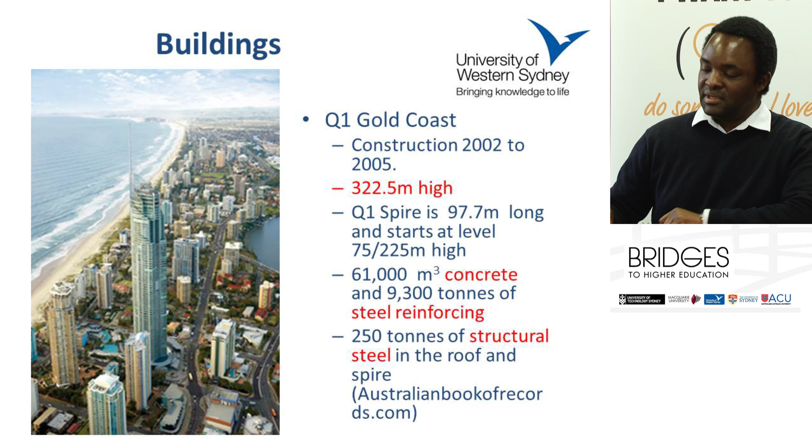The other structure which might be of interest, or which people might have heard about, is Taipei 101, constructed between 1999 and 2004. It has 101 floors, and is made from steel and concrete filled columns.

With the concrete filled columns, we can classify those members as composite members. We have a tube made from steel, and inside these tubes we have concrete infill. One advantage is that steel is a ductile material, while concrete is not a very ductile material.

When concrete is confined in steel, we're able to use a material with high compressive strength, but we also improve the ductility of that concrete because it's working as a composite material confined by the steel tubes. This structure, Taipei 101, is about 508 meters tall.

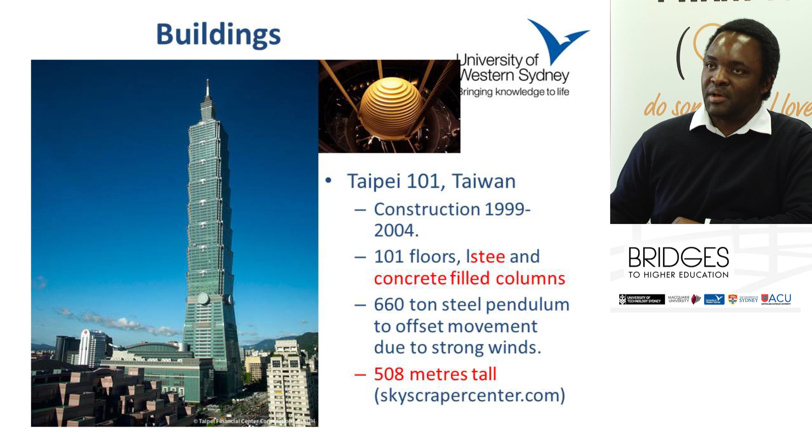And maybe a building for the future, the Kingdom Tower, which is supposed to have started construction last year and is scheduled to finish in 2019. So this building is going to be 1,000 meters tall.

You can see from the structure that maybe the rest of this structure is actually a spire at the top. A lot of times, developers of structures want to break records, and one of the ways they do that is to use structural steel to form a spire at the top, so that they can gain a lot of height.

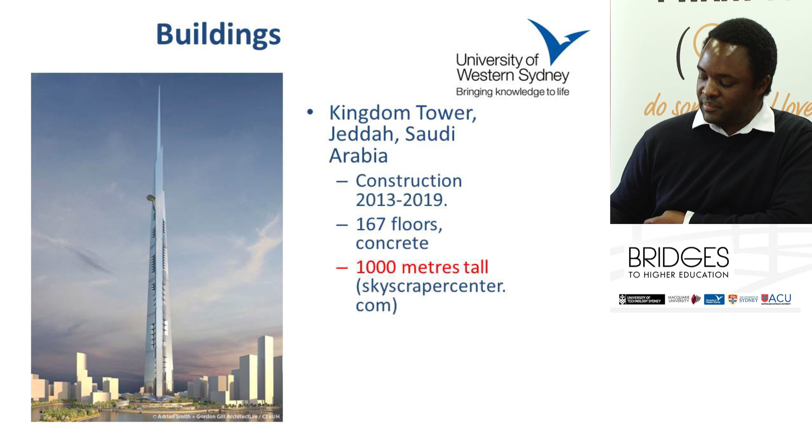The advantage for steel is that it's lightweight, and because it's lightweight, it's able to span very large spans. So if you take the spire as a cantilever beam at the top, it's able to resist the wind loads which might be at the top of the structure, but still be serviceable. It's not going to deflect as much, and it's also not going to bend as much, so it's able to carry the loads which are mainly wind loads at the top of the structure.

I think a lot of times we don't consider timber to be a material that we can use for high-rise buildings. But as you can see here, there have been quite a lot of developments in timber structures. So there is a new type of material which is called cross-laminated timber.

This material is manufactured using laminations of different layers. By doing that, we actually improve the reliability of the material. And then if we use these panels, they actually have compressive strength which is quite close to that of concrete.

But the advantage of timber as well is that it's not as brittle as concrete, and we also don't need to reinforce it as we would require to do for concrete.

So this Forte building in Melbourne, it's 32 meters high, which is, I think, one of the tallest timber structures in Australia. But I understand that there are a lot of other buildings around the world as well which are made from timber for sustainability reasons, because timber can become a carbon sink.

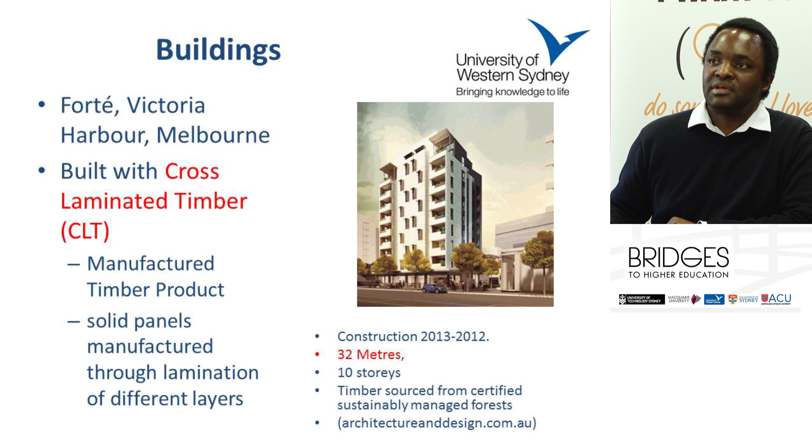And for bridges, I think we all know the Sydney Harbour Bridge, which was built starting maybe from 1924 and officially opened in 1932.

I think one of the interesting statistics is that there were 6 million hand-driven rivets which were used. If you compare that to modern day construction, we no longer use rivets anymore - we use high strength bolts, and a lot of times, because welding processes are becoming more and more reliable, we also use quite a lot of welding.

This is maybe one of those things where you can see that as time goes on, as we develop new ways of doing things and new materials, we also tend not to use some of the methods which we used to use in the past. But for Sydney Harbour Bridge, I think most of these rivets are quite sound, and the bridge is doing quite well for a bridge of that age.

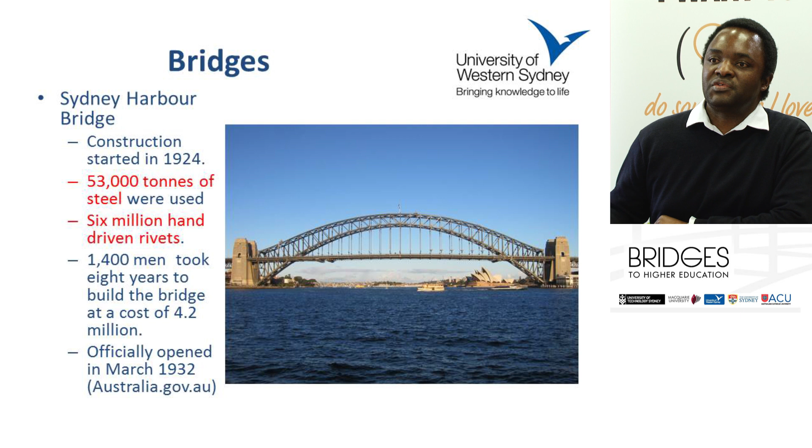And the other bridge that I thought could be a bridge of note is the Millau Viaduct, which has a length of 2,460 meters. And at the highest point, if you are looking at the height from the ground, it has a height of 343 meters. And one of the tallest piers, I think it's Pier 2, has a height of 245 meters.

And you can also see that a lot of concrete has been used in this bridge, but the bridge deck itself is actually made from steel. So 36,000 tons of steel has been used to build the bridge.

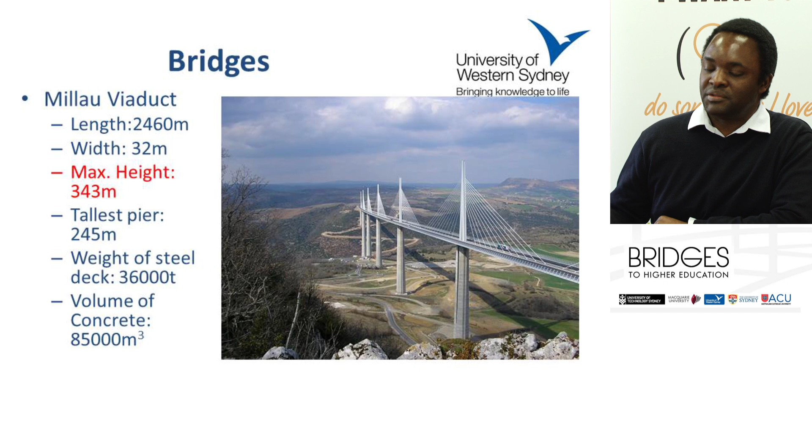Now I think I can move on to talk about the design philosophy for structures in general. One thing we try to achieve when designing a bridge is to make sure the size of members are able to carry the loads. If we have a bending moment, the cross section should be able to carry that. If we have shear force or axial force, the members should be able to carry that, and we have to look at combinations of loads as well. When a structure is built, it has to support itself, so we look at the self weight of the structure, and it also has to resist external loads. So when a lot of people move into a building, or a lot of cars cross a bridge, we have to make sure the structure is still able to support all those loads.

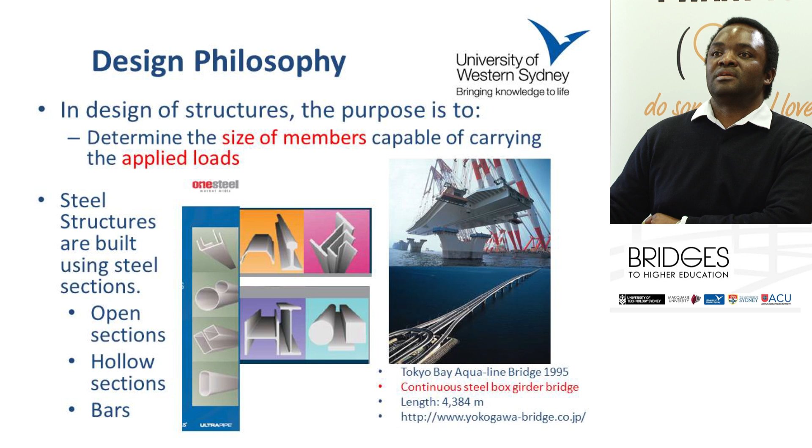So that's looking at steel, and we can also look at concrete. A simple concrete beam would have reinforcing steel and stirrups, with concrete poured around this steel using formwork. But if we start to have quite large spans, such as the ones you can see here, from this pier to here, then we need special type of sections - this is a box girder. Using these box girders, which might be maybe 2 meters high and probably 1.5 meters width, we should be able to build a structure able to span a much larger distance compared to normal beams or concrete beams.

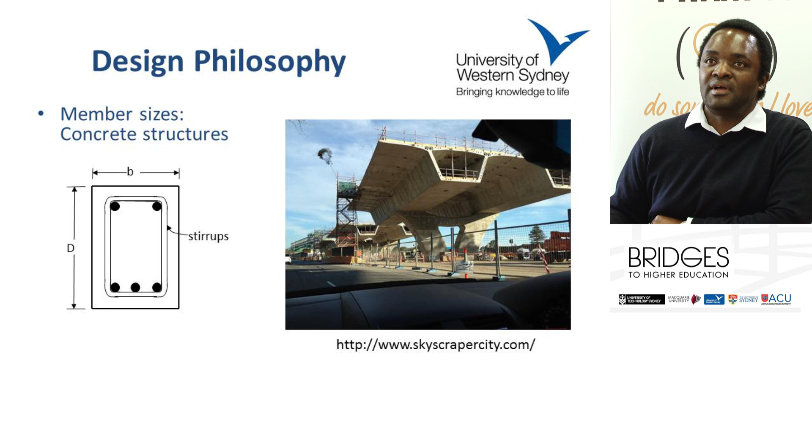In addition to that, we can also have pre-stressing, with pre-stressing cables running throughout the section, because we know concrete works mostly in compression. So when we use pre-stressing, we are making sure concrete remains mostly in compression, and then it's going to be able to carry the loads we require it to carry.

If we look at timber structures, we already talked about cross-laminated timber panels when looking at the Forte building in Melbourne. But in general, for housing, we normally use sawn timber, which could be softwood or hardwood. This is useful for domestic buildings, where we have much smaller spans.

But as we start to build structures made from timber with very large spans, we need to start using special type of timber sections - manufactured wood products. This one is a glue laminated timber, and if you compare the size of the depth of this beam to this gentleman in the picture, you can see the depth is quite high. Through the use of much deeper beams, we know we are going to be able to span much larger distances without any problems in carrying the loads. This might be useful for Olympic-sized swimming pools, for example, or auditoriums in terms of construction.

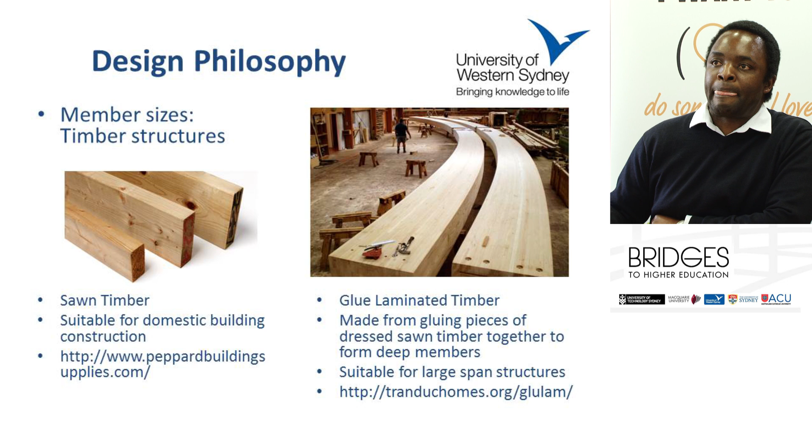One of the other things we have to look at in terms of design is to make sure that our structures are stable and also serviceable. By stable, we mean that if a structure is built, it's not going to topple as wind blows, or if we have an earthquake. So we have to make sure our structures are fit for purpose. Depending on where the structure is, the expected wind loads, and the expected size of earthquake, we have to make sure our structures can support that external load and remain stable for us to live in them safely.

Structures are also supposed to be serviceable, which means that over time, as the structure is in use, it's not going to deteriorate to a level where it can suddenly collapse.

Some of you might remember the I-35W bridge over the Mississippi River in Minnesota, which collapsed, and there are quite a number of theories as to why that might have happened. Some people think there were plates within the structure which were smaller than they were meant to be, but this is the difficulty of forensic engineering after collapse of buildings. It can be quite difficult to pinpoint the causes of failure, because when you look at the structure itself, any point between the two banks could have been a member which failed first. So it can be difficult to tell where the failure originated from.

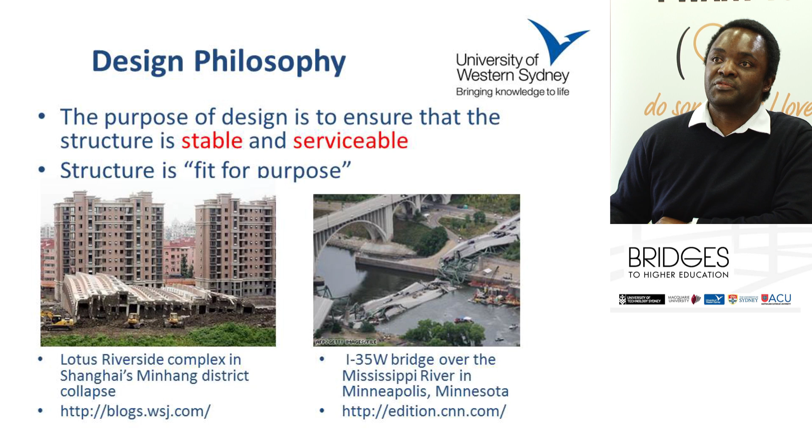As part of our design steps, we normally need to look at the loads. We need to determine the worst combinations of loads, look at temperature effects, and sometimes our structures are just affected by the materials we use within them.

If we use concrete, we know that we are going to have shrinkage. With shrinkage, we might also have stress related to the size of members getting shorter than we expected. The temperature effects could be an opposite effect.

What happens if we have a steel structure and we have high temperatures? Some of you might have heard about the wheel in Melbourne, which was built, but because of a lot of warping within the structure, they couldn't use the wheel. We also need to consider, for welded structures, the weld shrinkage. When we weld structures, we actually induce stresses, which are referred to as residual stresses within the structure. This is one of the considerations we have to have.

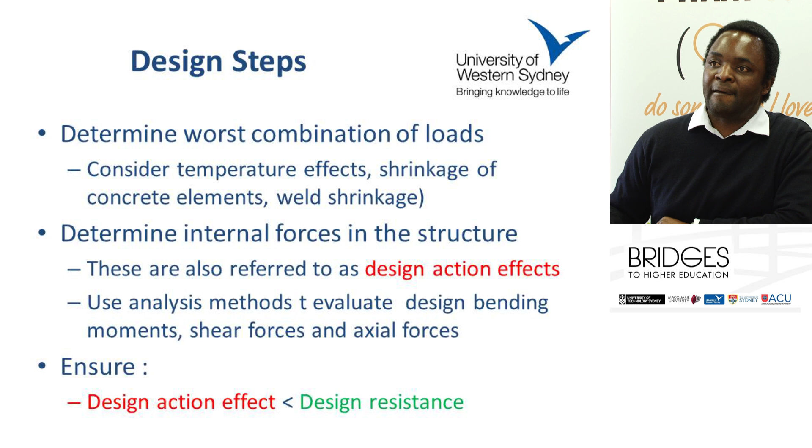In looking at design, we need to determine what the worst combination of loads are, and we also need to look at the resistance of the structure against the applied loads. If we have the design resistance larger than the design action effects, then we know the structure should be okay to withstand the loads applied to it.

I thought maybe we can have a brief look at how we design steel structures, for example, under bending. For bending, if you look at this equation, the nominal section capacity is equal to Fy, which is the yield stress, multiplied by the effective section modulus. This is just to show you the importance of knowing the material within the structure. Fy is the yield stress, and I will talk about that a little bit later on.

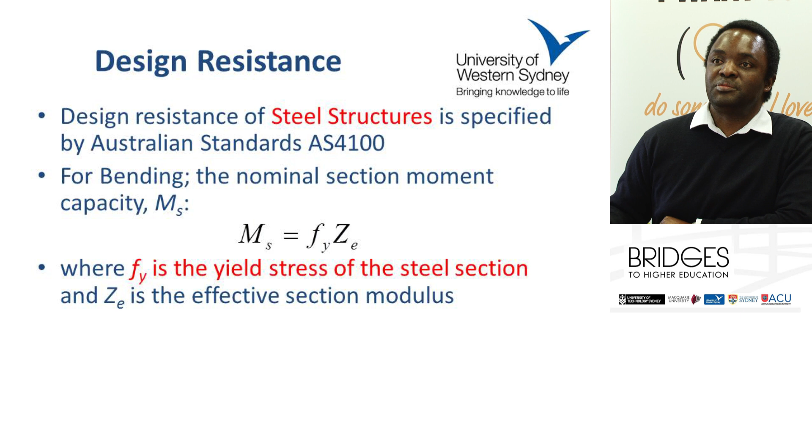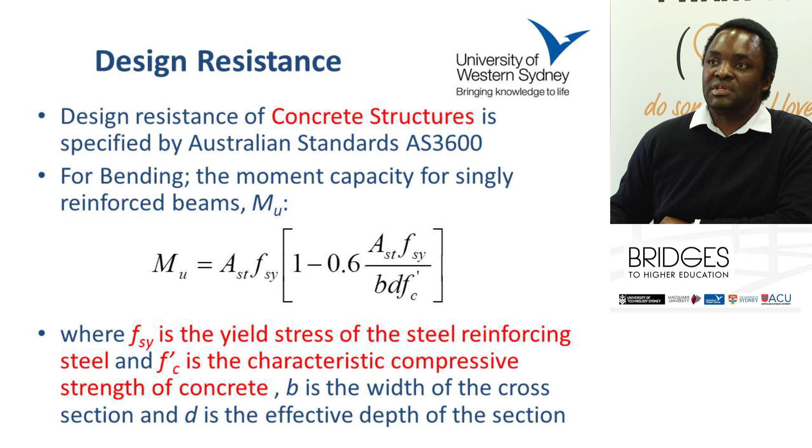If we look at concrete structures, for singly reinforced beams, the equation for determining the moment capacity of these beams is given by this equation. Within this equation, we have Fsy, which is the yield stress of steel reinforcement, and Fc dash, which is the characteristic compressive strength, along with the width and depth of the section. This also shows us the importance of understanding the stress strain curves. By testing the materials we are using and understanding their behavior, we should be able to use those values in the design of the structure.

This is just to show you maybe one of the methods that we use for determining strength. So in this diagram here, you can see the cross section, and you can see the neutral axis.

And for reinforced concrete, we know that concrete doesn't do very well under tension. So what this does then is ignore the concrete which is below the neutral axis, and we are just using the tension from steel.

Because the cross-section is in equilibrium, we know that the compressive force from the concrete in compression should be equal to the tensile force in the reinforcing steel. So there has to be a balance, and if we wanted to know the capacity of this, we can just multiply either the compression or tension force by the distance between these forces.

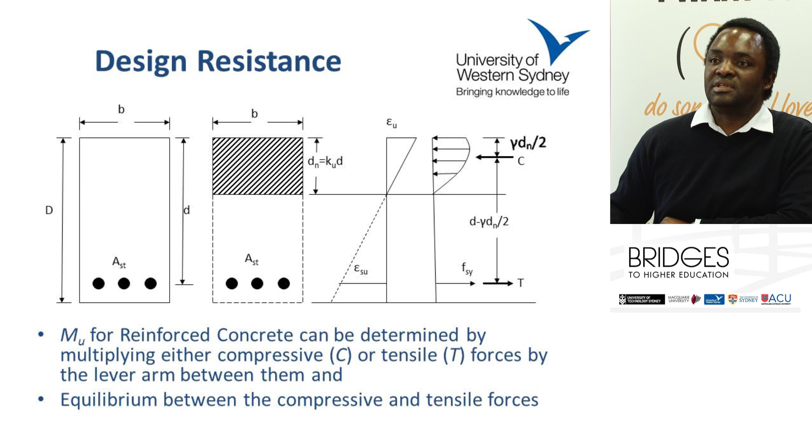And that actually allows us to have a good idea of the capacity of this particular cross section. So that's the equation you saw earlier on. It's just formulated using equilibrium and also considering the forces under compression and tension in this case.

Briefly, if we were designing timber, we also need to know the value of FB dash, which is the characteristic bending strength of timber, and we also need to know Z, which is the section modulus. But you can see here that for timber we have all these other factors which take into account the design conditions under which the timber is working.

So for timber, it tends to be affected by moisture, for example. It's also affected by creep, so long-term deformation. And so we need quite a number of factors to take that into account to make sure that the capacity we determine is a safe one.

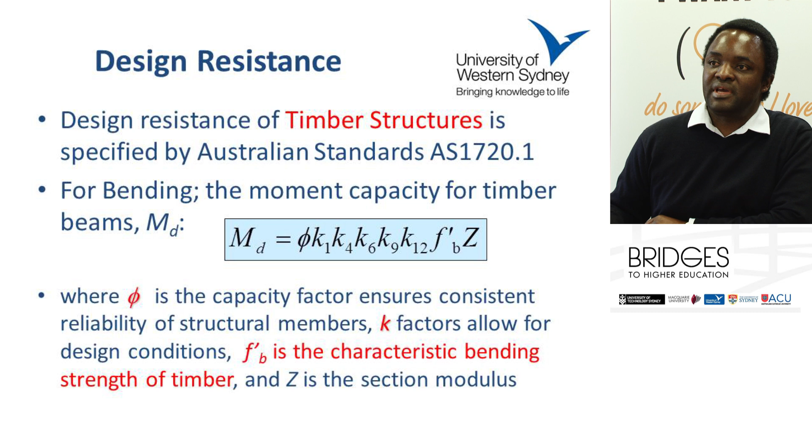So one of the things that we saw in all this determination of resistance is that we need to know the stress strain curves. And if we know what the stress strain curve is for the steel, for concrete, and also for timber, then we should be able to use those characteristic strengths in our design equation.

For us to do that, I think you might all be familiar with the determination of material behavior, using for steel mostly tensile coupon tests, but we can also test steel in compression. And for concrete, normally we are required to know what the compressive strength is, but we can also determine the strength of concrete in tension, although for design we normally ignore the strength in tension because it's very small.

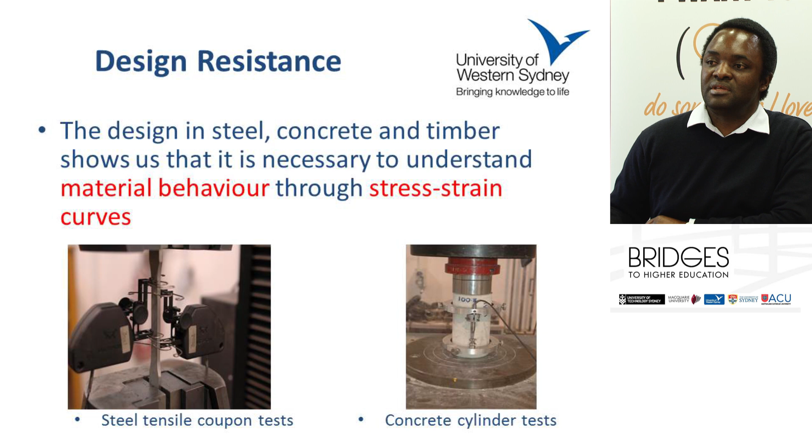This just shows the stress strain curves for steel. If we have mild steels, they tend to have a yield plateau, which is considered good because when we have a structure under load, we want this plateau here to inform us when we have overloaded the structure. So when the structure is deforming at this level, we are given a chance to move out of the building, for example.

So if you want, it's good for safety of structures. But as the strength of steel becomes higher, or if we have cold formed steel, then we can have a slight differentiation in terms of the stress strain curve. You can see that for grade 400, we don't have a well-defined plateau as we had for grade 250 and grade 350, which are mild steels or low strength steels.

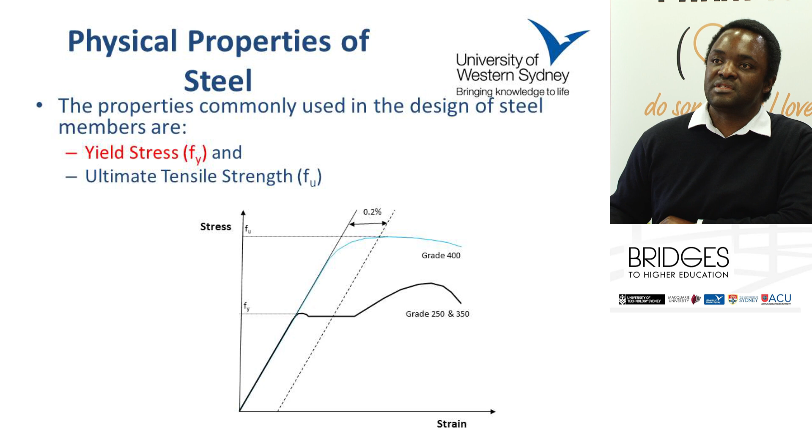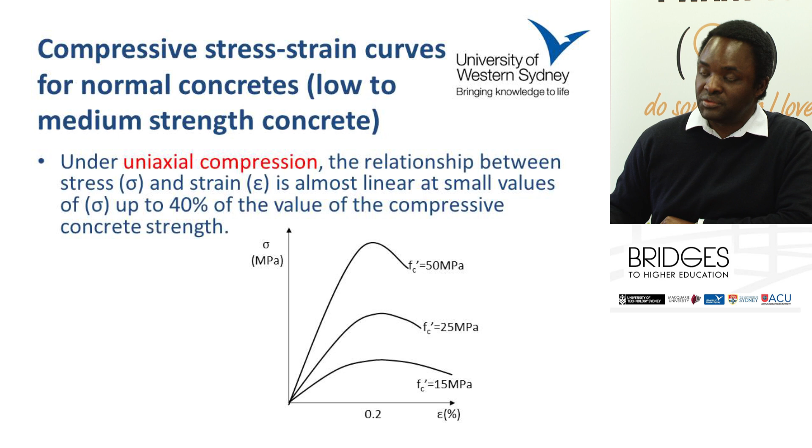And for concrete, we also look at concrete under compression. If we look at the stress strain curves, we can see the behavior of low strength concrete compared to relatively higher strength concrete is a little bit different. For high strength concrete, we start to have more brittle behavior compared to lower strength concrete.

As I said before, for the design action effects, what we need to consider is the different loads that we can have on the structure. So we have permanent load, imposed load, and we can look at wind loading, snow loading, depending on where the structure is, and we also need to determine the earthquake loads. In addition, if you were looking at water retaining structures, then you are also looking at water pressure on structures. So the loads would normally depend on the location.

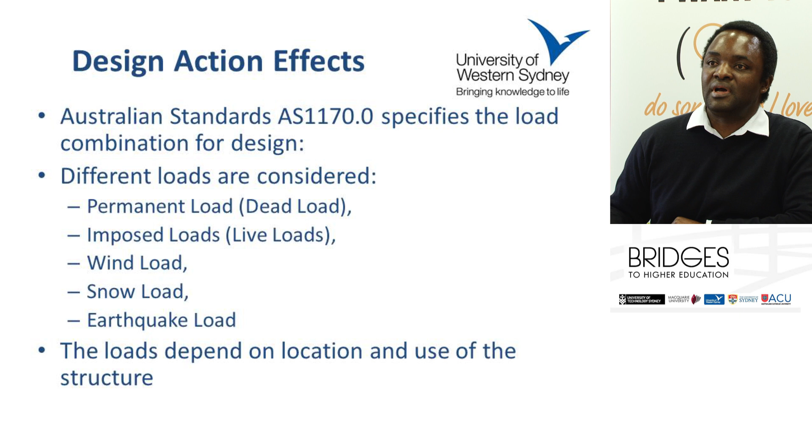So the wind loads depend on the location, the snow load on the location, and earthquake load on the location, and the use of the structure. So the live loads would depend on what the structure is used for. And this is just an example to show us how we can determine the design action effects.

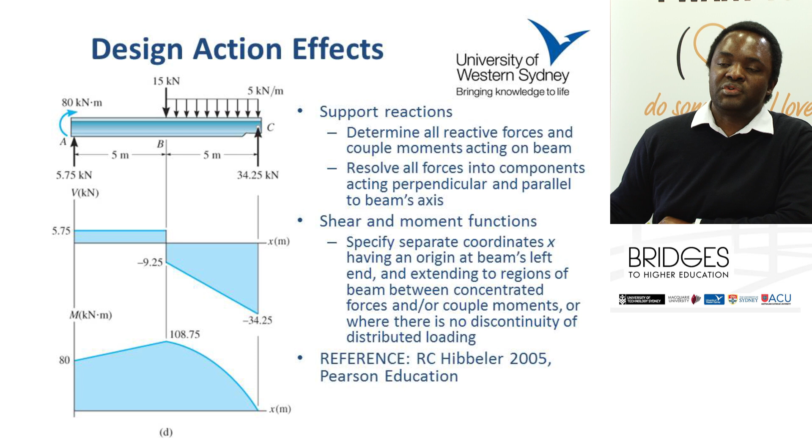So if we have the loads on the structure, we should be able to determine the support reactions, and we should be able to determine the shear and moment functions. And by doing that, we should be able to draw the shear force diagram and also the bending moment diagrams.

Just to conclude, in this discussion we can see that material stress strain curves are quite important, either in tension or in compression, depending on the type of use we have for the structure. So the stress strain curves are quite important for determining the capacity of members, which is the resistance of members that we need to know.

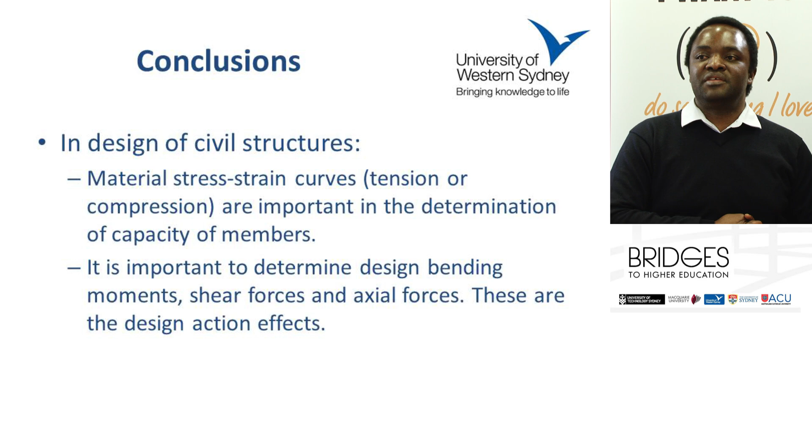In terms of design action effects, the determination of bending moments, shear forces, and axial forces are also important because they inform us about the design action effects, the negative effects on the structure. If we know these two things, then hopefully we should be able to design reliable structures for whatever design life we require.

For the materials that we can use, we said we can use steel, concrete, or timber, but in most buildings the materials actually work as a composite. So when we use steel, we also tend to use concrete at the same time. If we bond the steel and concrete together using shear connectors, then we have what's referred to as a composite section.

In one of the buildings that I showed before, we also had tubular members. If you have a tube which is filled with concrete, then it can also become a composite section. So maybe in addition to steel and timber, we also tend to use concrete and maybe composite sections.